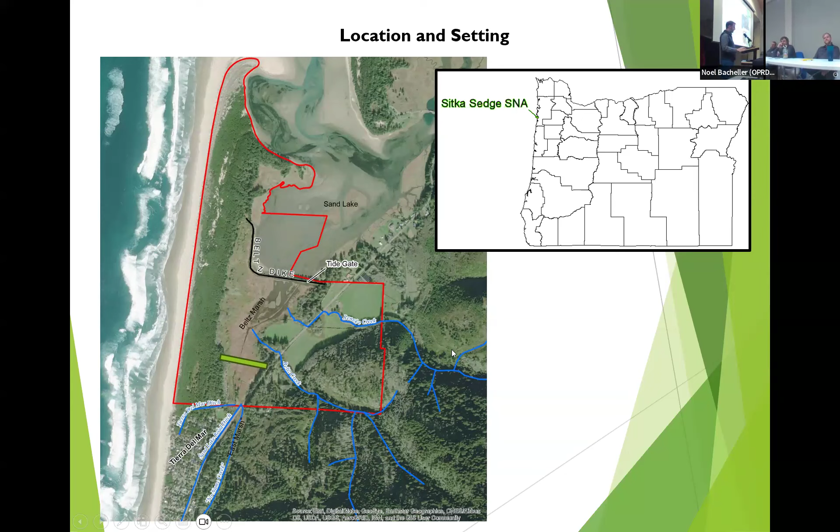The features that I was pointing out earlier to those that are here in the live audience is the size of this existing tide gate. This is about a 4x4 opening in the dike, and it's a concrete box culvert. The flap here used to have 4x12s on it. Those 4x12s are all gone now, so water rushes through unimpeded, and it blasts through this thing like a fire hose.

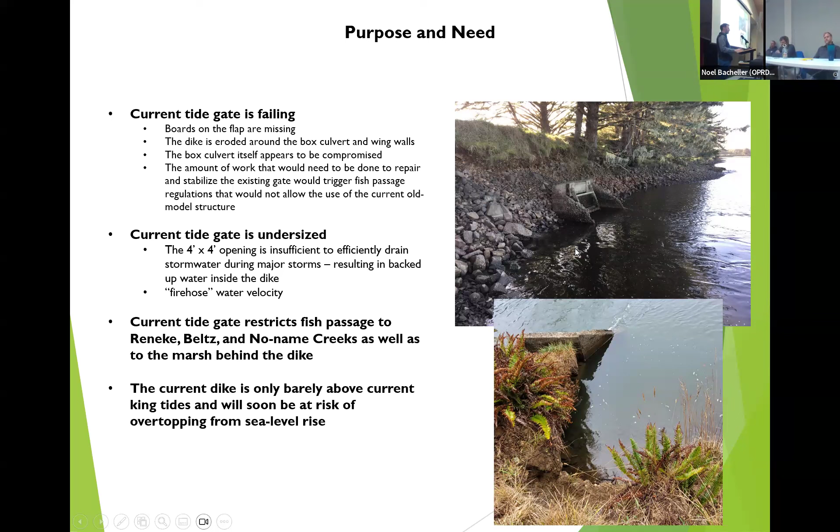This photo at the bottom is showing the amount of erosion that's happened inside of the dike as a result of the really high water velocity blasting through the tide gate. We get eddies here that eat away at the inside of the tide gate. This tide gate, I didn't mention this before, but this tide gate is not repairable legally because of modern fish passage laws. So it would have to be replaced with something bigger and better, like a muted tidal regulator or something else that meets modern fish passage requirements.

I went over this verbally. I think probably most people online heard me say most of this stuff already, so I'll skip past that one and that one. Pointing out these alternatives that we looked at before. This is the existing condition, do nothing, leave the tide gate exactly as it is. As a bookend reference condition, the other end of the spectrum is to breach the existing dike.

Then the more actively pursued options are muted tidal regulator. Shown here, this one has 2 doors, side hinged, that have a set closure setting, which can be chosen as part of the construction design. And then the setback dike here, shown in red, is the last option that was pursued, which would have a muted tidal regulator in it, but a much smaller one because it only has to pass the water from a couple of ditches and one creek.

This setback dike would be accompanied by a breach of some sort in the existing dike, maybe with a bridge over it, maybe with a boardwalk. That is yet to be determined.

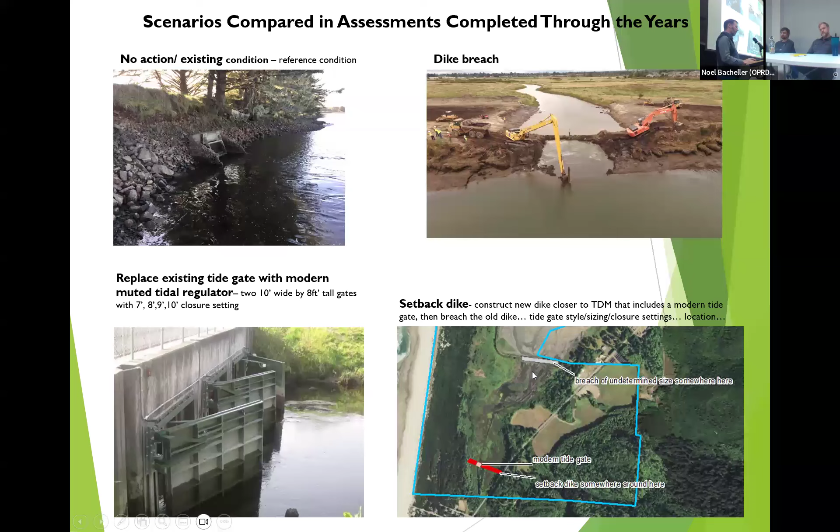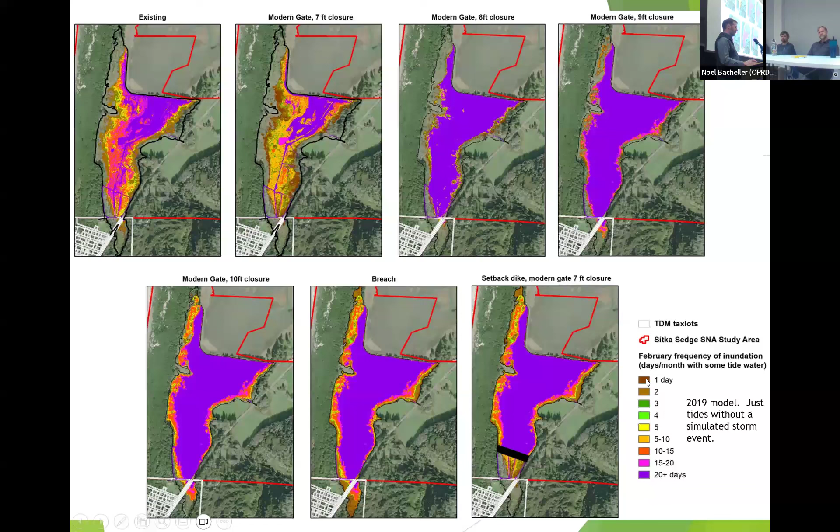Then this graphic I was explaining also as an example. There are many other graphics similar to this, but this one is showing the month of February and the number of days in the month of February that each spot on this map experienced tide water. The hotter the color, the more days, well, not the hotter the color. The purple color is the most days of water. The brown color is very few days, like 1 day of tide water being present at that spot on the map.

Then here's where we were with the video, and I'll start this back up again. The upper left is the existing condition up here. It's the existing dike and the broken tide gate that we already have. We have the modern tide gate with an 8-foot closure setting as the second frame. The third frame is the no dike situation. This could be seen as 1935 or before, or it could be a breach. This is just as if there were no dike at all. This is what you would see in terms of water. And then the setback dike is the frame furthest to the right.

The graph at the bottom shows the water surface elevation that is modeled or observed to occur in each of these locations. So in the case of the blue line, this is the water levels that were observed outside of the dike. These other lines are what would be expected under either the modern tide gate with an 8-foot closure setting in this orange color, the setback dike alternative in this sort of reddish color, and the existing condition in this greenish color. The blue color at the bottom here is rainfall. And this rainfall event that we're seeing here is a 50-year storm event, approximately.

And what we're seeing, both in this graph and up in the map above, is that under these circumstances of a large rainfall event, the water just doesn't go out for days. And this is because of the small carrying capacity of that undersized culvert through the dike. So days on end, water in, whereas the other potential alternatives all flush out that tide water every day, every tide cycle without much of an issue. There are minor differences in how quickly it goes out, as you'll see, as it runs through these scenarios.

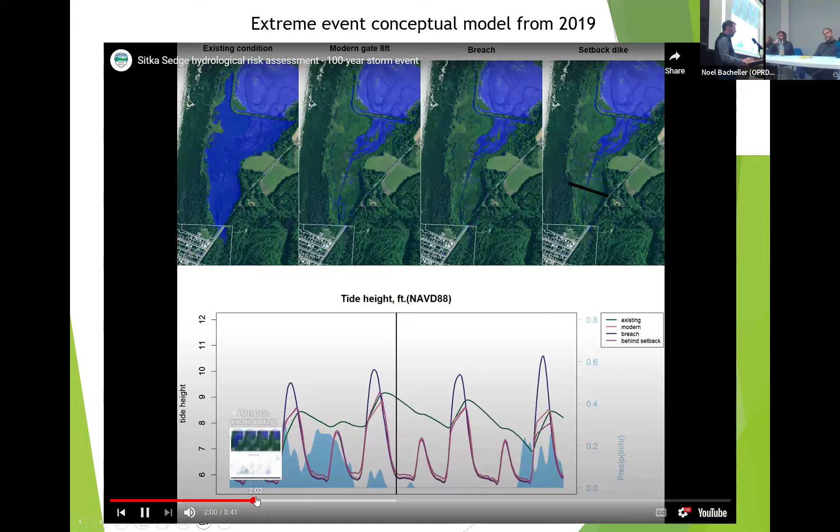And it's most obvious when we scooted ahead to a 100-year storm event, coupled with a 12.2 king tide, which is the highest ever observed tide that we know of in Sand Lake. So this blue here is like a ton of rain, right? And this 12.2 foot tide here is coming up on the screen. You'll see how far the water penetrates into the south as a result of that incoming tide. And see it passes way down into here. And you'll see it also passes way down into that terrain in the existing condition as well. Passes through somewhat also in the other alternatives, but as you'll see, they all respond a little bit differently.

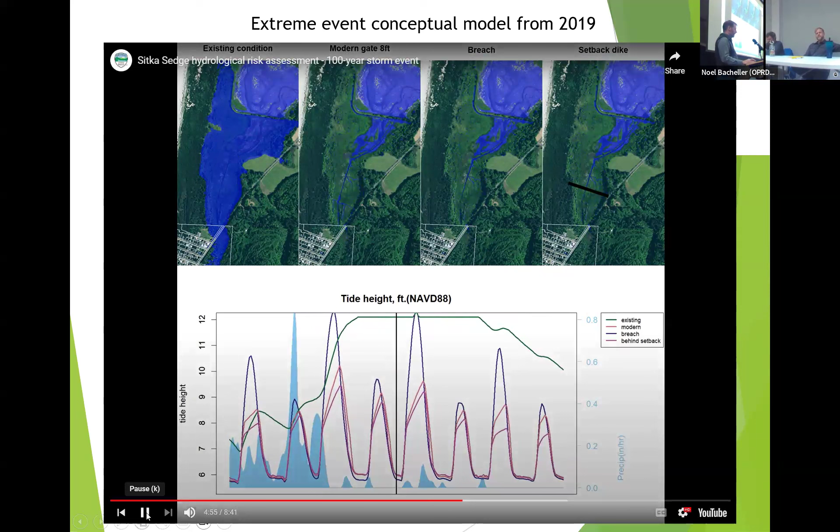The existing condition, however, stays in, as I said before, for days on end, and it is really the worst case scenario as far as surface water near Tierra del Mar goes. You'll note also that on an outgoing tide, the setback dike drains out a little bit faster than the modern tide gate through the existing dike. So that's the gist of that video. And this is available on our website, and it has been for quite some time.

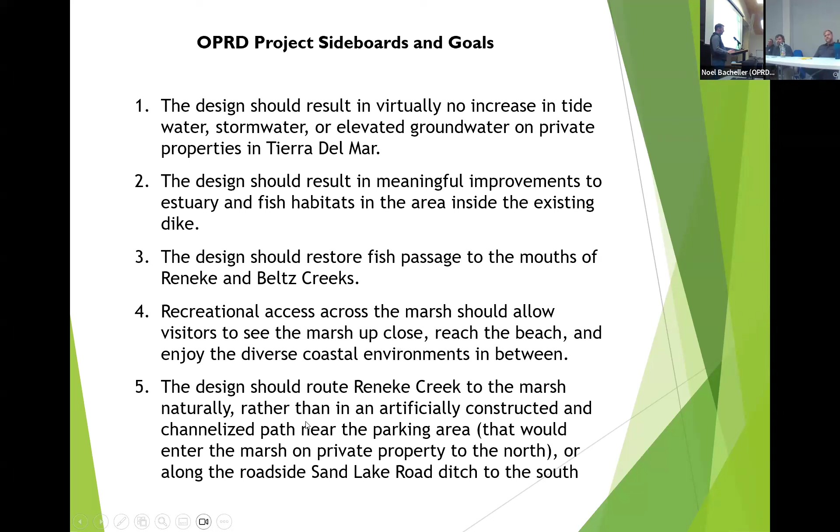I will move on to the next slide, which is Oregon Parks and Recreation Department's stated goals for this project. Number one is that the design should result in virtually no increase in tidewater, stormwater, or elevated groundwater on private properties in Tierra del Mar. Number two is the design should result in meaningful improvements to estuary and fish habitats in the area inside the existing dike. Number three, we should see some fish passage improvements to the mouth of Reneke and Beltz Creeks. Recreational access should continue, and the design should route Reneke Creek to the marsh naturally and not in a ditch.

So comparing the pros and cons of the various alternatives. This was all done in 2019. There was a public tech team process to go through all of these alternatives and hear testimony from a variety of standpoints. And these collected pros and cons get at the content of that 2019 process.

Modern tide gates in the existing dike is another alternative that has been assessed over the years. The pros of this are that it limits tides reaching private properties in Tierra del Mar. It lets stormwater out efficiently. It gives some fish passage, but the cons are the fish passage is not perfect. There would still be a relatively small opening in the dike with excessive velocities during certain stages, which would cause potentially erosion, scour, changes in the way that sediment accumulates in the mouth of the dike. It's better, but it's not as good as the setback dike in terms of overall package.

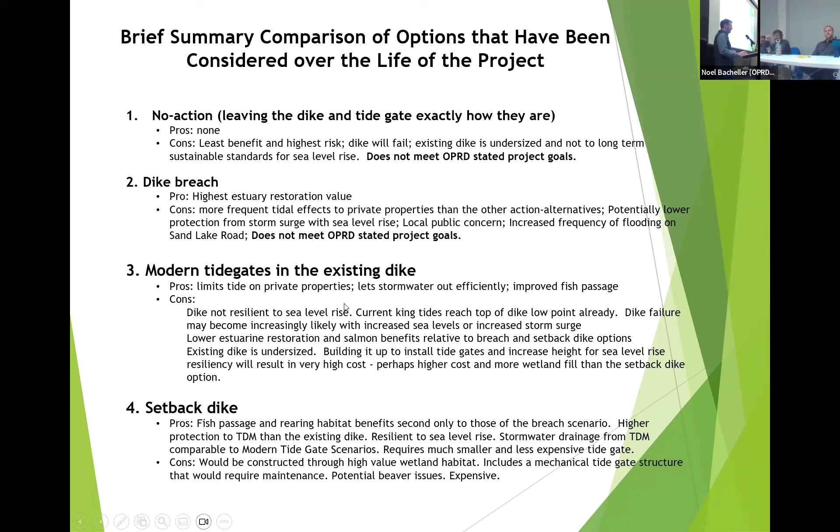And in 2020, Oregon Parks and Recreation Department leadership, after presenting the options to the Tillamook County Commission and to the Oregon Parks and Recreation Commission, and after the series of four tech team meetings in this building in 2019, OPRD leadership chose the new setback dike as the alternative to pursue. And in 2020, issued a fact sheet about that decision, which is still on our website to this day. And in the summer of 2020, while we were looking into pursuing grants, OPRD received a letter of support from the Tierra del Mar Community Association.

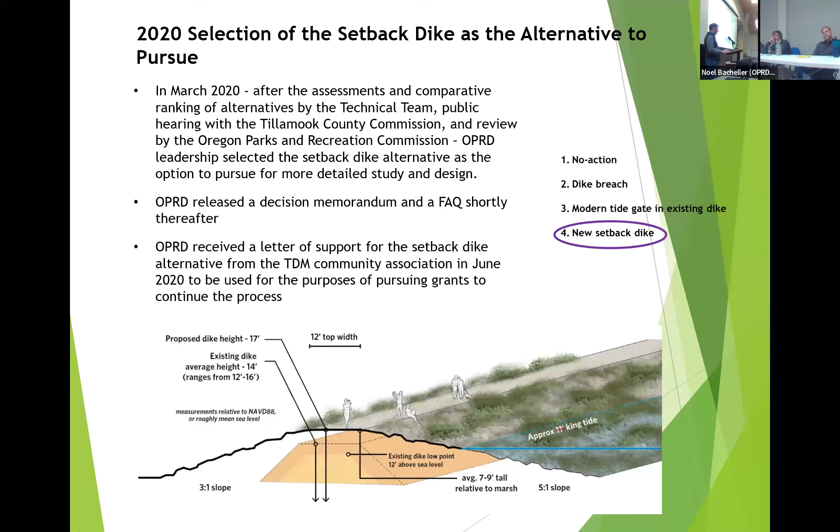Then 2020, right? That was COVID year. Everything got kind of derailed. OPRD staff no longer had capacity to really pursue this. And fortunately, Tillamook Estuaries Partnership was there with the expertise and the grant giving ability to step in and be a great partner in helping to continue to move this forward. And so in 2020, Tillamook Estuaries Partnership really took the reins on finding money, finding a contractor, and moving design forward. And that has moved us up to our current status of 30% design.

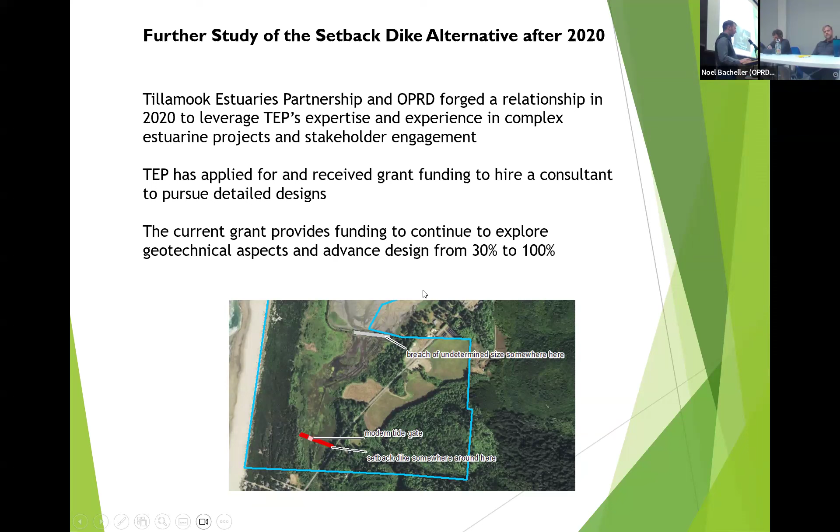This process that was undertaken by Tillamook Estuaries Partnership in coordination with Oregon Parks and Recreation Department involved hiring Environmental Science Associates, and you'll hear from Hunter White on a lot of this work coming up as the next presentation, but it involved trying to figure out exactly where a setback dike would need to be. And this is kind of experimental. You have to try different places, model them, and see how they turn out. So there was a little bit of moving it around and finding the sweet spot for where a setback dike would be.

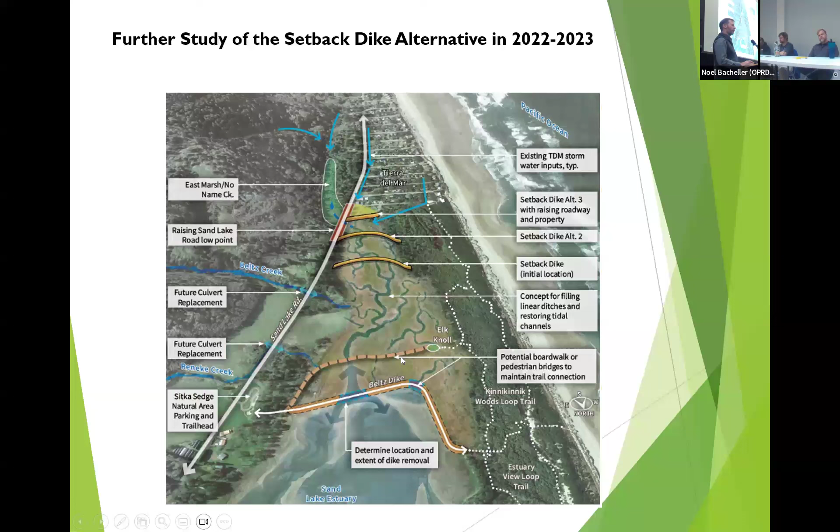We also had to investigate what exactly would happen to Beltz Dike itself. Would it be a single breach, or would it be multiple breaches? Would there be bridges? Would there be boardwalks? These are all the kinds of things that were assessed in the first 30% of design.

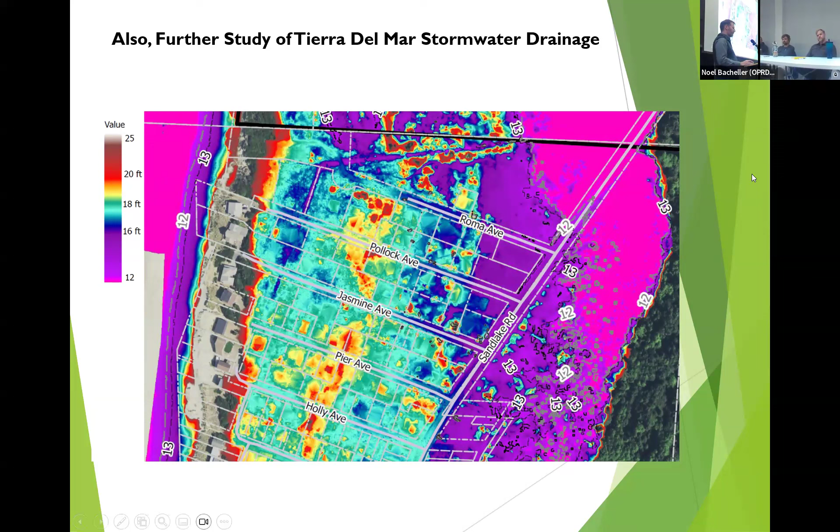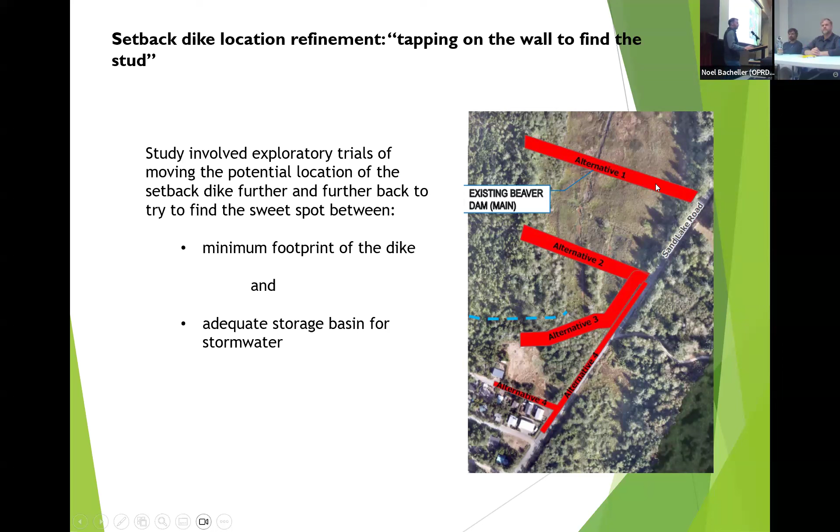We found that using the criterion of needing enough storage basin for the stormwater coming down from No Name Creek, Tierra Del Mar, Sand Lake Road Ditch, and Tierra Del Mar Ditch, the storage basin capacity was such that the setback dike had to be pretty far north to handle all that water. At the same time, we're looking to minimize the potential size of the setback dike because this is a lot of nice marsh area that would be impacted by placing the structure here. In the end, alternative one was the only alternative that met all of the goals and criteria for this project. It was the furthest north.

It had adequate capacity to store stormwater flowing downhill into the marsh. The setback dike has a tide gate in it, and when the tide comes in, that tide gate will be closed. While that tide gate is closed, there has to be enough space behind the setback dike to store all the stormwater without raising the water into Tierra Del Mar. So the further north you move it, the better able it is to store that stormwater without backing up. Alternative one was that spot.

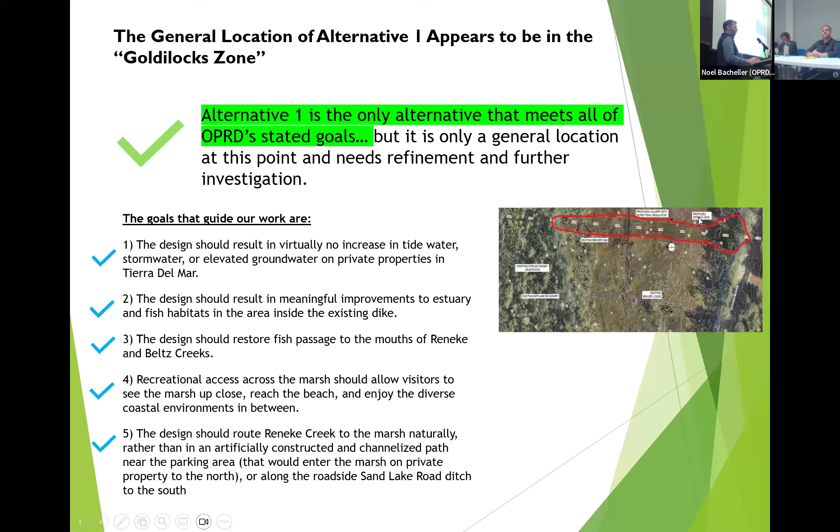So the setback dike has effects on habitat. As I said before, there's 1.5 acres of wetland habitat that would be covered by a new setback dike. But on the other hand, the project, by allowing unfettered estuarine tidal function to occur, would restore about 70 acres of natural estuary that's been closed off from the estuary and marine influence for many years. The natural tide cycle would be restored in about 78% of the land within the range of the tides behind the tide gate, and 85% of the marsh within the park.

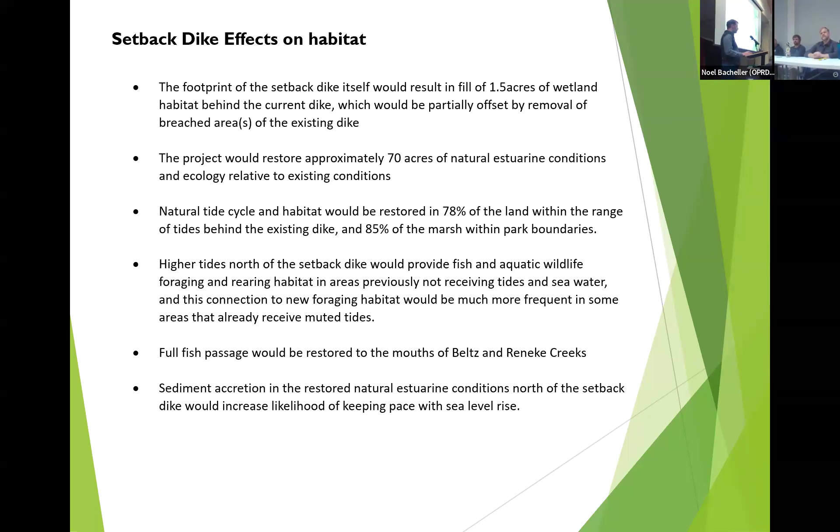The higher tides north of the setback dike would be a great benefit for fish and wildlife foraging in that area associated with estuarine habitat. There would be full fish passage restored to the mouths of Reneke and Beltz Creeks, and the sediment accretion rate gives us a better chance, better odds of being able to keep up with sea level rise.

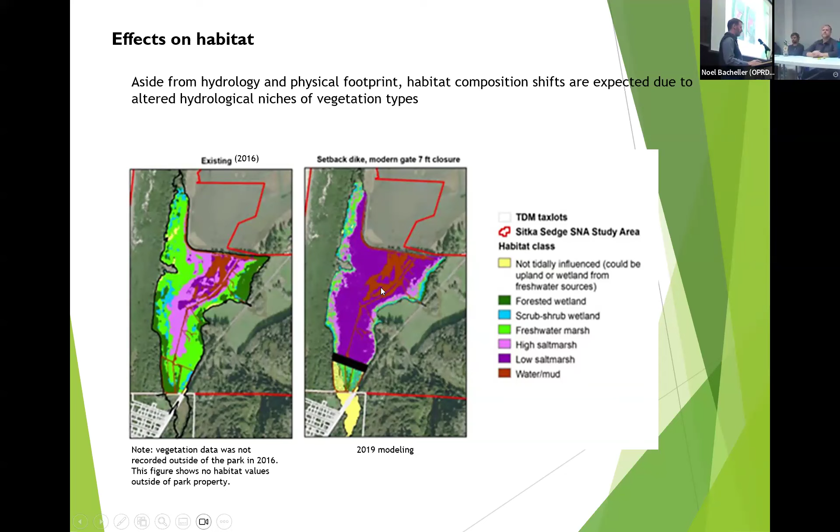In this situation on the right, the setback dike with a modern type 7-foot closure, what we're seeing is that the habitat shifts towards low salt marsh and pushes the other habitats towards the edges of the marsh, as more water is allowed to flow in its natural form in the estuary with the setback dike.

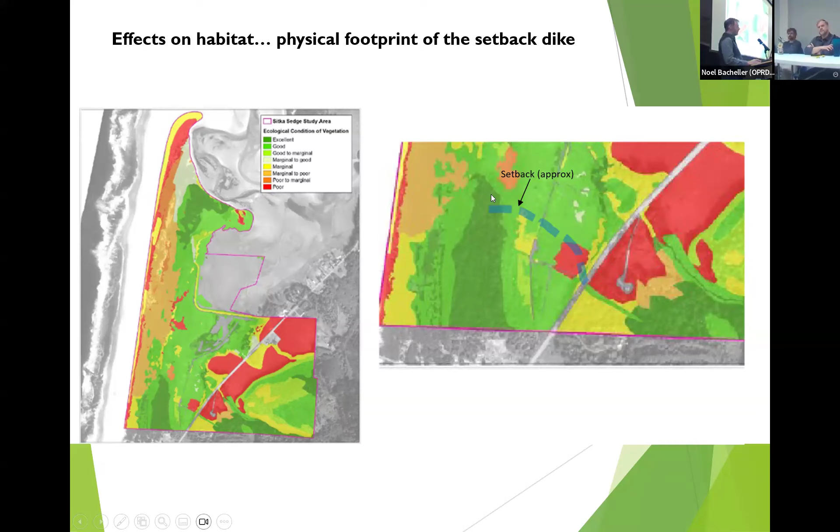In terms of the condition of the habitat that is potentially impacted by the setback dike, this map ranges from greens to reds, greens being habitat in excellent condition, lighter green being good condition, yellow being marginal, red being poor. These conditions are largely based on the vegetation that's there, whether it's weeds or good stuff. Red is mostly weeds, dark green is almost entirely good stuff.

The effects on private property are a huge consideration here, and the setback dike would block the tides from the high tide gate closure settings from intruding into private property. Since it would allow water to flush out more efficiently, it would dramatically lower the amount of water backup during big storm events. Sand Lake Road would no longer be overtopped by periodic flooding that currently results from water backing up in the existing condition.

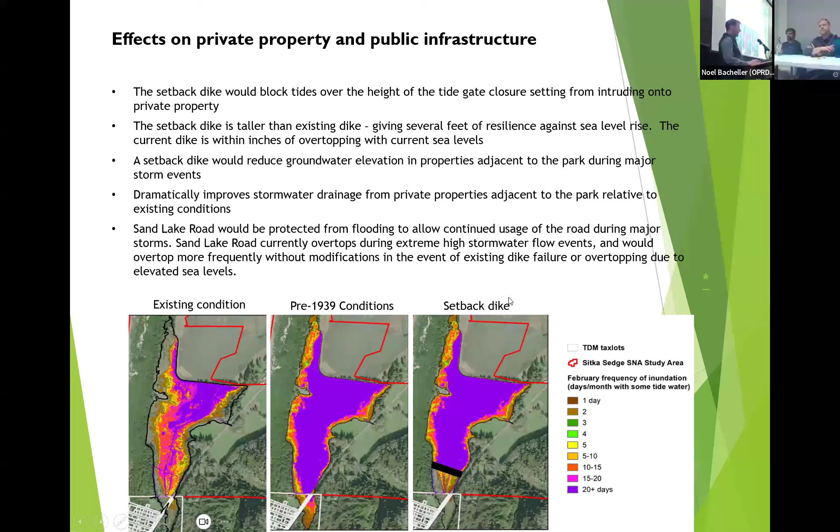The question mark is whether much of this green is already wetland or not, and we don't know that yet.

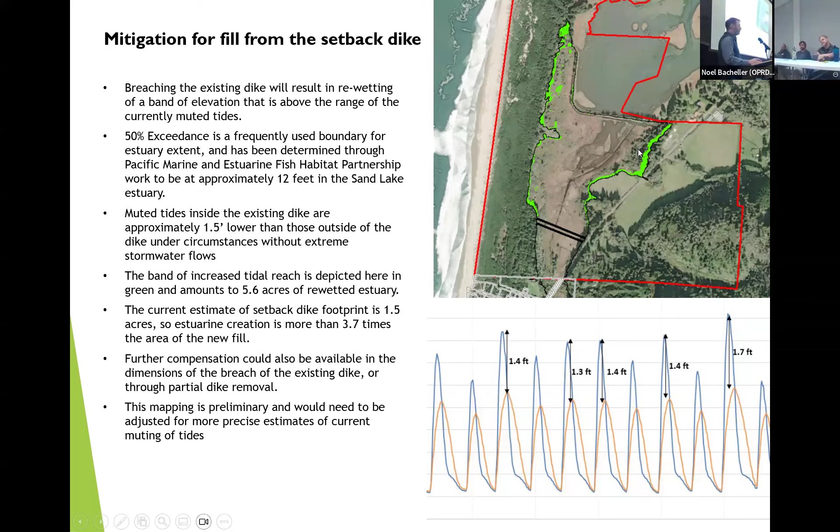My last slide here is next steps. The big next step we've been waiting to do for quite a while, that will really inform the next stages of design, is geotechnical assessment of constructability and cost, etc. We need to move design forward from its current 30% phase to 100% phase. We need to investigate permitting, exactly what that looks like in terms of mitigation, county permits, FEMA permits, etc. There's a lot of moving parts there. And grant funding is huge. Right now, Tillamook Estuaries Partnership has received a new grant that has allowed us to restart this process with funding sufficient to bring us to 100% design, but there's no money yet for implementation or construction. So that's the huge piece that's hanging out there for later.

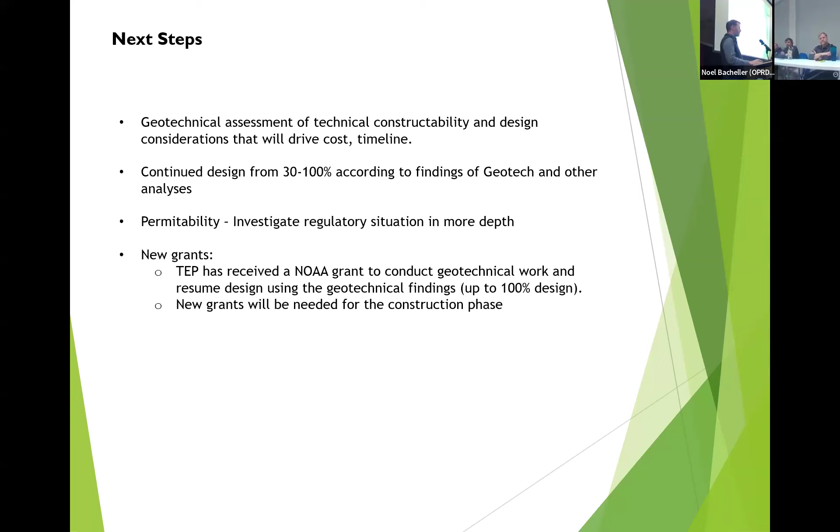And with that, I've concluded my section and will hand it over to Hunter.

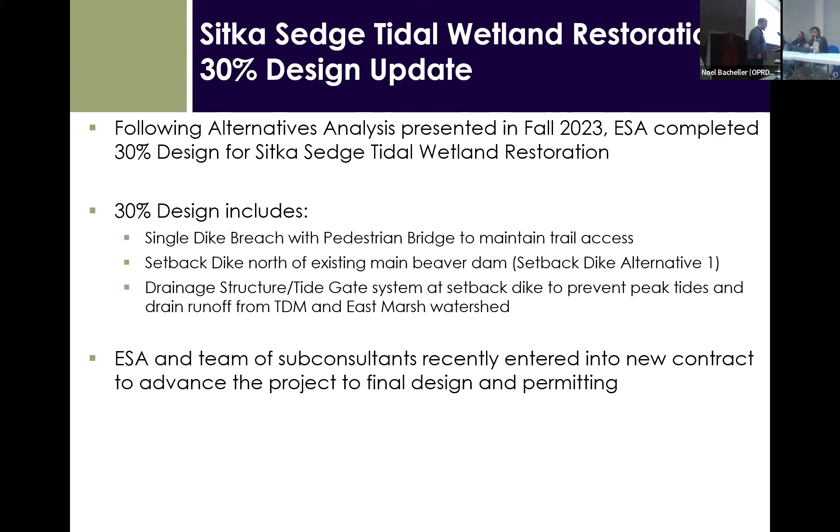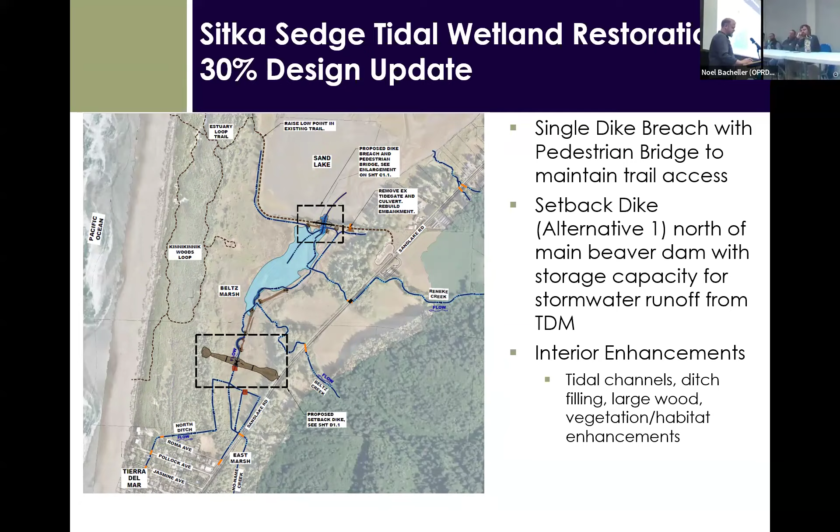So I'll start zooming in on each one of these elements and talk a little bit more about each one. Here we're zoomed in on the proposed dike breach. We're showing our grading plan for opening up the dike here. You can see in cross section down below how we maintain trail access, recreational access to the larger trail network within Sitka Sedge State Natural Area.

The plans currently show a 200-foot span pedestrian bridge over this breach, and this is a detail that we'll be refining as we move forward through additional hydraulic analysis, looking at how sediment will move through that breach, the tendency for that to scour, erode, or fill in with sediment. So we'll be doing a lot more work to determine how big and how deep to make this.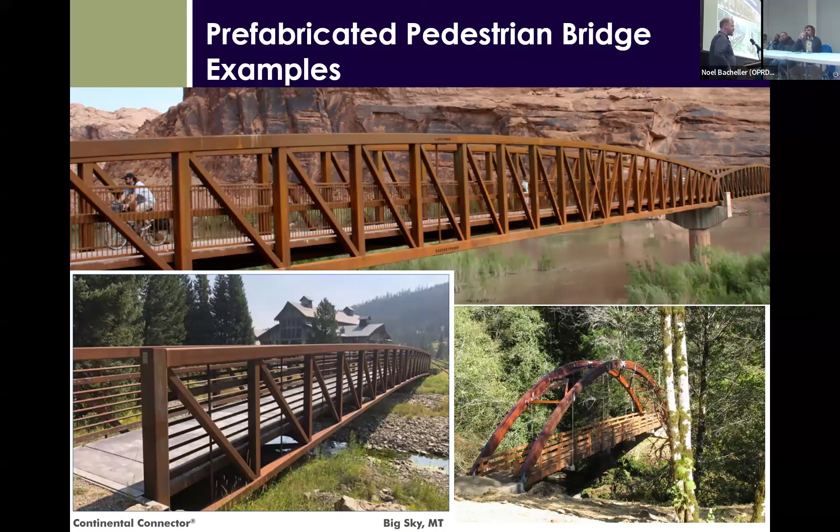Part of that, as Noel mentioned, was to make sure that we had enough storage capacity behind the setback dike to contain all of the stormwater runoff from Tierra del Mar while not increasing water levels—but in fact lowering water levels beyond what currently occurs today.

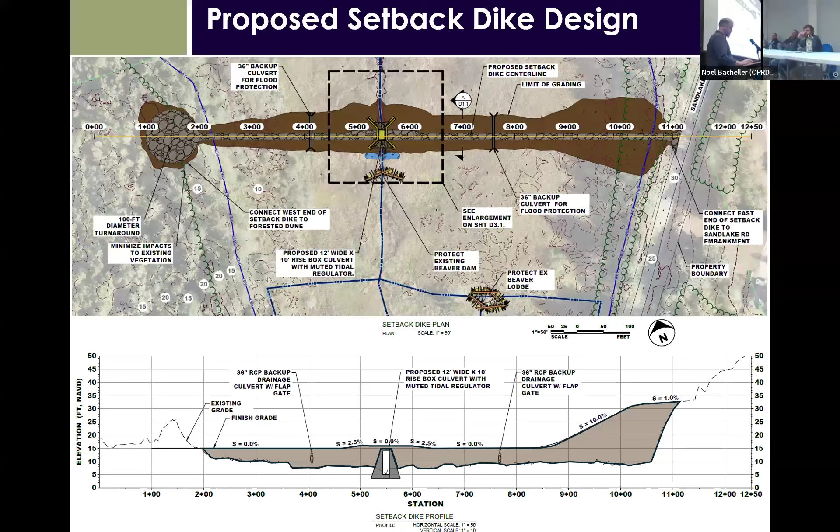So looking at the setback dike in cross section, showing the height of the setback dike. On the bottom here, we're showing the existing ground surface of the marsh, with about 10 feet of fill here. The multiple lines you see are really showing that we will need to overbuild this dike even higher than we want it to end up, because when you place all of this fill on soft marsh soils, we will experience settlement of the ground beneath.

So we'll likely need to build this dike over at least a 2-year period, doing an initial build height, letting that material settle, coming back in, building it up, topping it off to where we want, and overbuilding it extra tall, so that in 50 years from now, with continued settlement that will occur, the dike will still be tall enough as we look out many decades into the future.

I am showing the 12-foot water level here in this blue line, just to show that the proposed height of the new dike is a lot taller than even the peak water levels that we see today, both to have extra room, extra freeboard factor of safety built in to handle those high water levels, as well as to be prepared in the future for sea level rise.

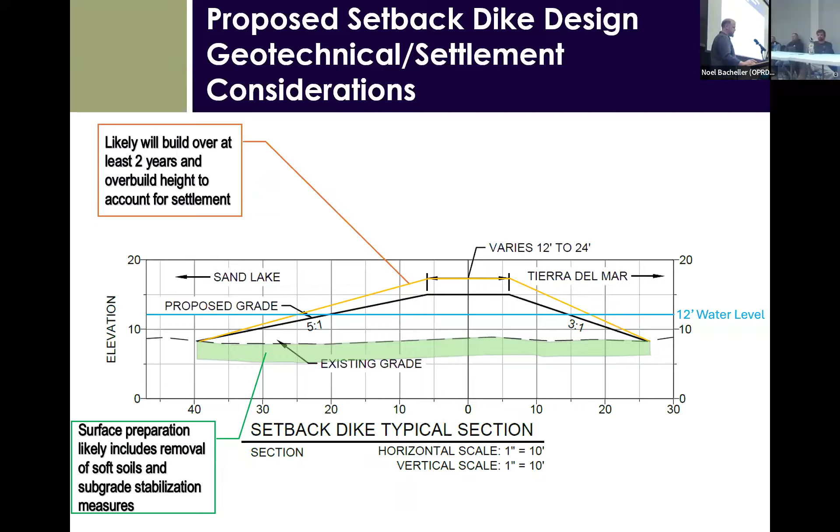We have some geotechnical investigation and engineering work ahead of us to inform what we need to do to the ground before we build this dike. This likely includes removing some of the soft soils, doing other subgrade stabilization measures to create a solid foundation to build the dike.

You see, because this is in an area of existing heavy beaver activity, we will need to make sure that beavers aren't going to be able to get in and block this structure. So we are working with ODFW as well as beaver specialists about how to make sure that we do keep beavers away from blocking the structure.

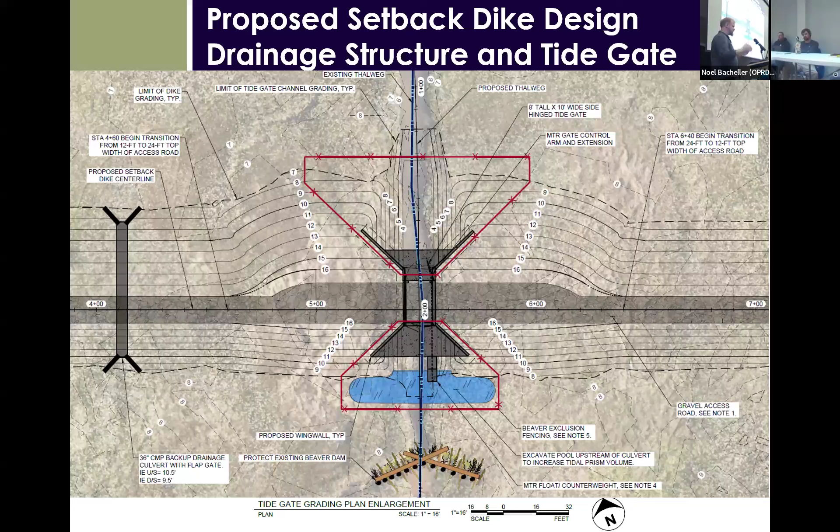You see here one of these extra redundant bypass culverts that we're proposing. They wouldn't be flowing all the time, but they would be perched up higher, so not attractive for beavers to plug in the first place, but in the event that something were to happen and the structure were blocked in some way, we would still have extra drainage capacity to drain off that high water. These will be fitted with tide gates, most likely just traditional flap gates, not intended for fish passage in any way, but to keep water from coming in while allowing that water to drain out.

Again, we're getting into some of our engineering drawings. This is a cross section of the setback dike at the proposed structure. This would have a concrete floor to it, essentially a large concrete box culvert with the tide gate system associated with it.

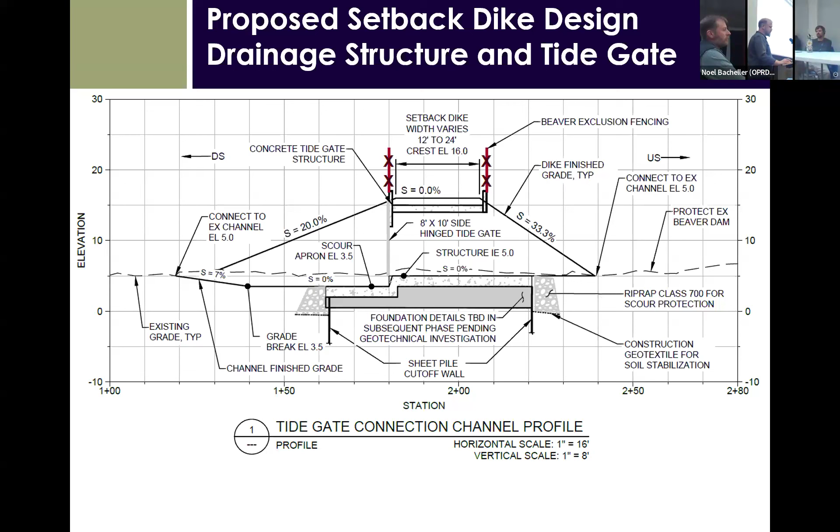So this is the level of design detail we're at right now. My team, as well as the structural and geotechnical engineers we're working with, have developed a number of these designs in similar settings, so some of the details here are consistent with other systems that we've built.

As we mentioned, because we're in an area that already has beaver dams, beavers will likely remain at Sitka Sedge after the reconnection occurs. So we need to think through and be prepared for how beavers may behave around the new infrastructure. Beavers are known to plug culverts when it's beneficial for their habitat, creating ponded areas for them. Blockage of infrastructure, like the culvert at Sand Lake Road and the East Marsh Crossing, now has a cage around it to prevent some of that blockage. These blockages have drainage and flooding implications, as well as maintenance implications that will have to be considered moving forward.

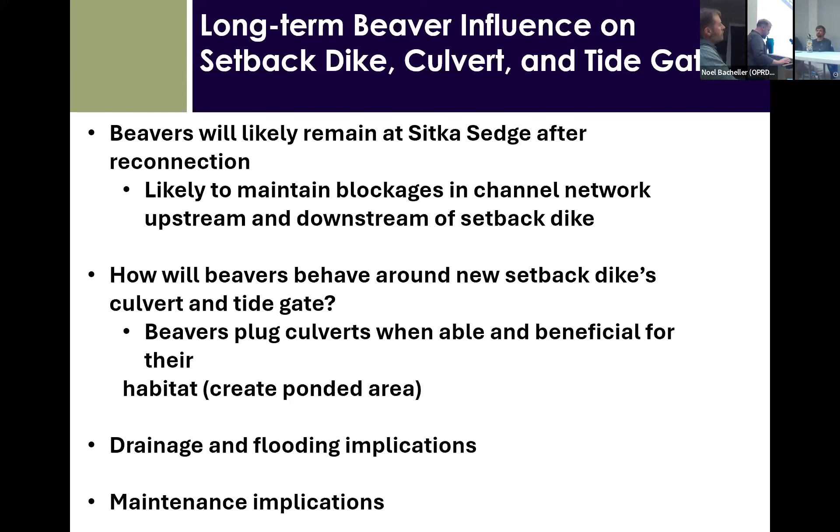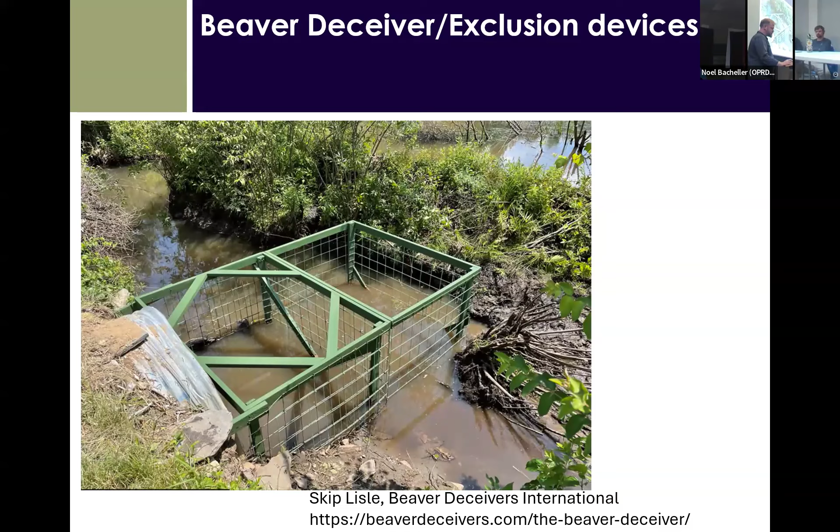But at this site, because as Noel mentioned, the vegetation and the wetland is high quality, there will be trade-offs to getting heavy equipment out into the marsh to do these sorts of interior enhancements. So as we look ahead, not only to fill ditches and dig new channels, but also install large wood structures that we often include for fish habitat, we'll be considering those trade-offs. Is it worth it to get out into the marsh to make these improvements versus the impact that work would cause?

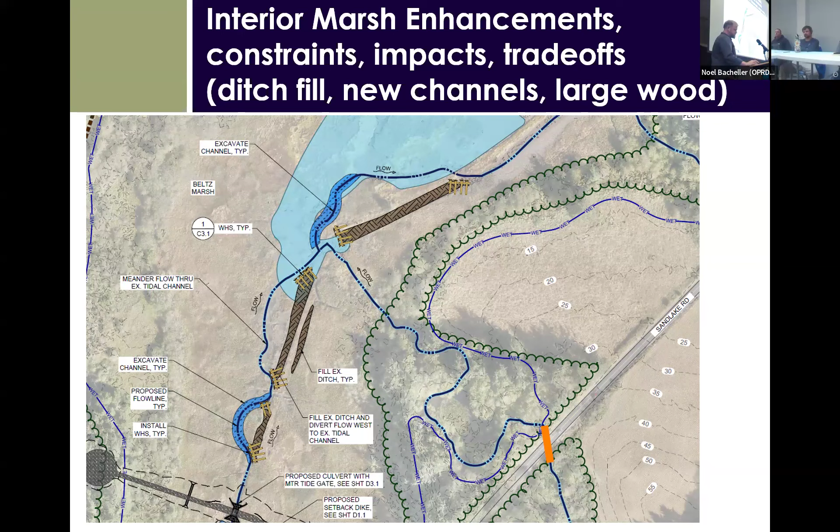You can see at essentially the same moment, there's water backed up in the ditch upstream of this culvert, while the downstream end is free flowing. It's not backwatered by tides at this moment. So this is really just a demonstration of the capacity of this culvert to drain water off of Tierra Del Mar. We are proposing to upsize this culvert as part of the project to improve the efficiency and drainage capacity of the Sand Lake Road ditch, which in turn should help improve the drainage of the rest of that ditch system.

As Noel mentioned, in the previous phase we did a much more extensive evaluation of Tierra Del Mar's drainage system and identified a number of potential improvements, deficiencies, and tough areas that really have poor drainage to get water away. Those could be addressed in a future project, but this is the one culvert that is directly within that range of potential tidal influence, so we are proposing to include that as part of the Sitka Sedge project.

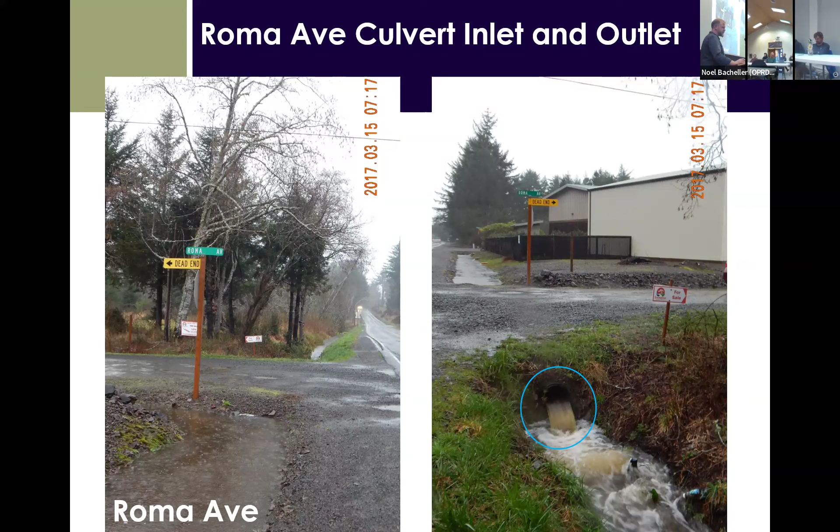Under the existing conditions, we do see 12-foot water levels at Sand Lake Road at this low point. Again, the setback dike will improve these water levels, but again, showing the 12 and 13 foot as just a reference point for the fact that this Roma Ave culvert is currently within that potential tidal range.

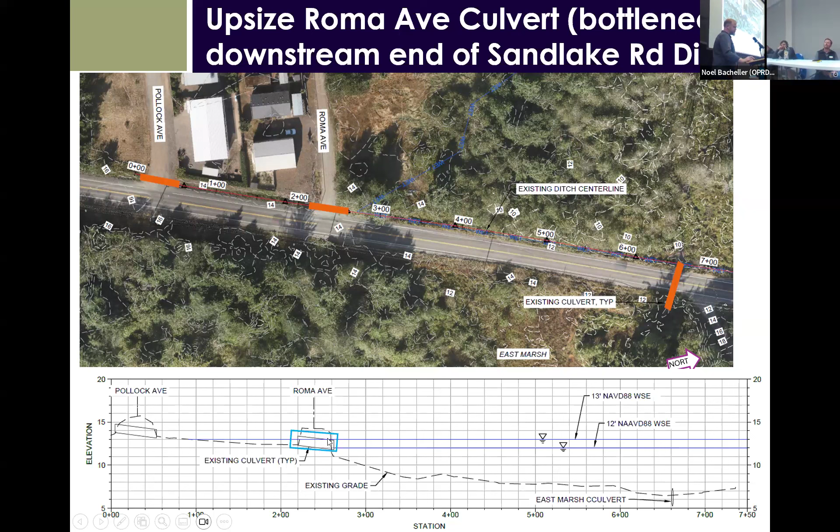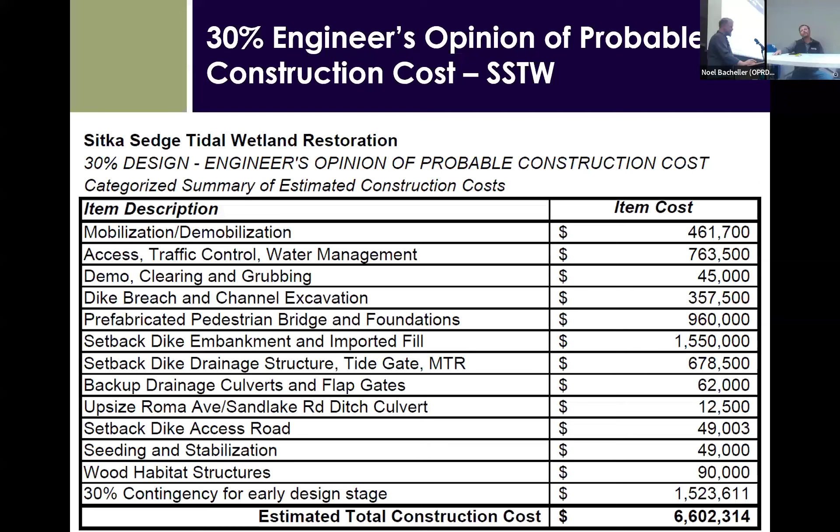And so at this point, we've just discussed all of the features associated with the Sitka Sedge tidal wetland restoration project itself. And now Chris and I are going to tell you a bit more about the Sand Lake Road crossings and work that we've been doing in parallel. Thank you. So I'm Chris Laity. I'm the Public Works Director and County Engineer. I wear a variety of hats with this. The nice thing about this larger project is the design team with OPRD, TEP, and others have decided to take a larger look at this, which includes Reneke, Beltz, and No Name. So not just Sand Lake itself, but also the roadway network. And I think that speaks a lot to the relationships that we have.

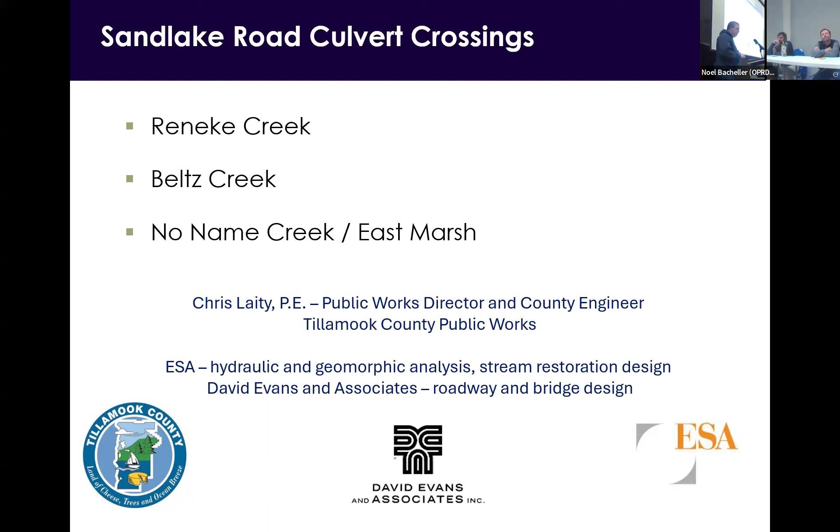So those are the three crossings that we looked at. In particular, we've got the Sitka Sedge, where you park and go out there. You've got Reneke Creek, the next one closest to Pacific City. If you look out there, it actually flows in the ditch line and then crosses the road. So for everybody that travels that, this is the location where you end up going through high water. If you notice recently, the water will go over the top of the road and it'll try to undermine the asphalt. A couple of weeks ago, we put some concrete on the downstream side, a concrete bridge beam. So if you're driving by there, you'll see something there that's intended to help protect.

Further to the south. So in this particular case, let me back up. 30% was funded to come up with the design for Reneke, Sand Lake, and the Reneke Creek. So concurrent to that work, because they're doing all the hydraulic analysis for this project, we wanted to understand the location of that dike and the impact of that dike. You're going to remove it, you're going to put a tide gate, you're going to set it back. How does that impact Reneke Creek? What kind of impact to the estuary?

So we contracted and completed a type, size, location study. Type, what size should that be, and what's the location? All that was really part of the hydraulic analysis associated with the dike. So ESA has completed that work, and through TEP we were able to identify additional funds to get that up to 100%. Beltz and the No Name culvert have made it to 30% design and have funding up to 30%. They are waiting for additional design money for that.

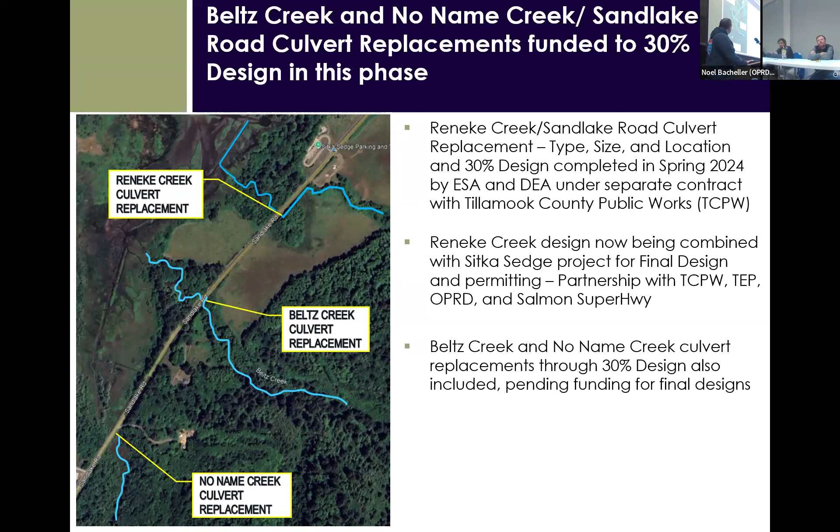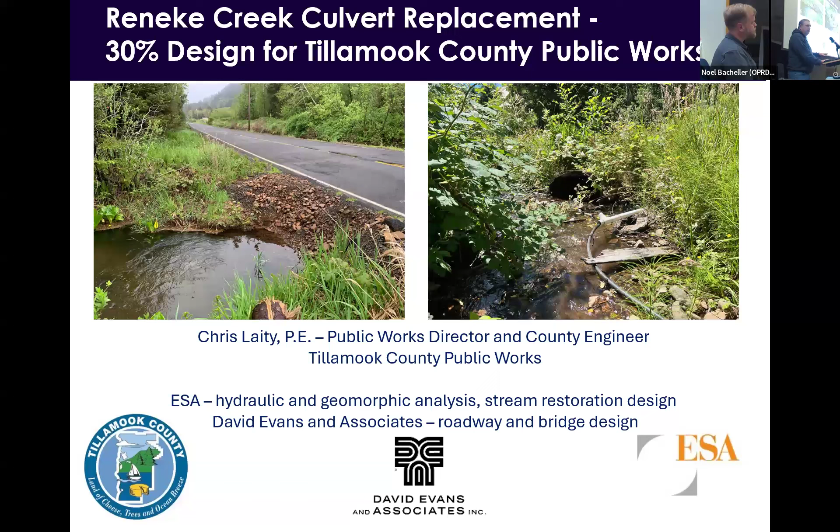Reneke Creek, a little bit more focused on Reneke Creek. The image on the left shows the outfall. That's the location where we ended up putting additional concrete that you'll see out there today. So existing conditions, Reneke Creek, as it flows from the coastal range towards there, you can see the original pattern. There used to be a 14-foot bridge out there once upon a time. Nobody can tell me exactly where it is, although I do have a great photo of that bridge. The creek was modified to accommodate a situation when the culvert was undersized, and it was carrying a lot of debris coming off the range there. Not so much coastal range, but the group of mountains that separate the 101 from here.

So all that debris would come down and it would plug the culvert. And then county crews would go out there and they'd unplug the culvert, and the estuary would come in and silt it back up. The county would then open it back up. The next winter, it'd plug up multiple times a year.

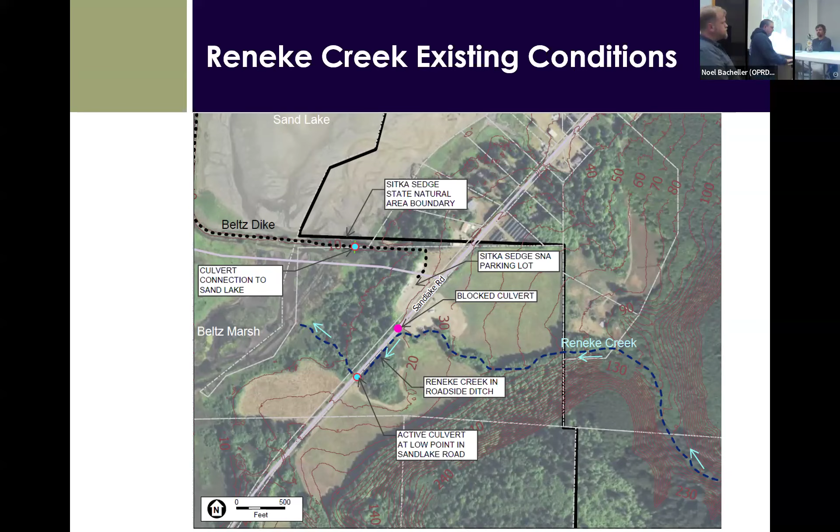So when you look at this in particular, the 1939 to 1953 to 1977, that really started to inform the discussion of what do we need to do today. So with this, I'll hand it back to Hunter.

Thanks, Chris. So as Chris said, in parallel with the Sitka Sedge project, we started working on Reneke Creek under a separate contract with the county. We wanted to look as far back as we could at what condition for Reneke Creek should we recreate here. And going back to the 1939 oldest aerial we could find, you'll notice a few things here. Really, this entire area was forested.

Reneke Creek itself, if you look more towards 1977, it's closer to what it looks like today, where Reneke Creek is really just in this narrow band of creek and alder trees, a very narrow riparian area that Reneke Creek has been constrained to. And also just to point out in 1977, as still exists today, there's this little triangular patch of forested wetland that still remains.

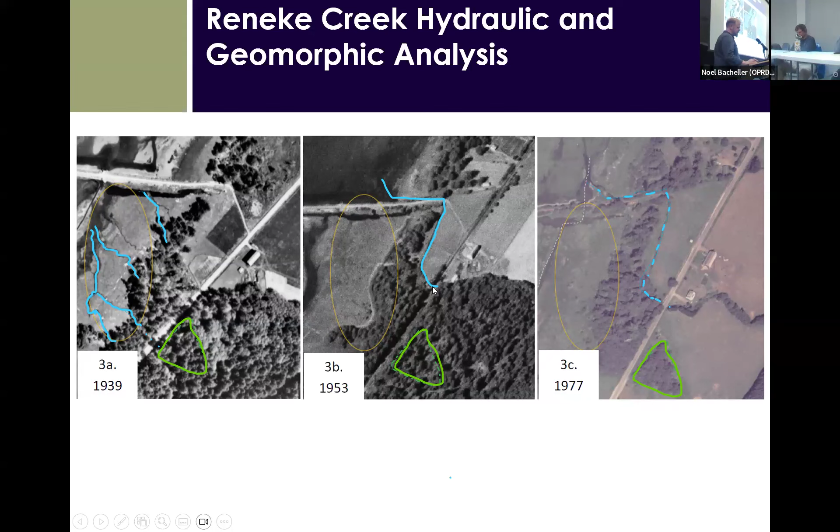There's been a lot of thought about should we be restoring Reneke Creek into this channel that some folks remember as the historical alignment of Reneke Creek. But our research is really showing that that channel was created and showed up just before 1953.

And so, in addition to this historical air photo analysis, we did an analysis of the geomorphology of the system, of really how does the basin behave? How does it move sediment? And what we found through analysis of LiDAR elevation data, as well as on the ground observation, is that Reneke Creek, when it comes out of the steep hillside, it's a very steep channel. It has the capacity to move a lot of gravel, but then once it hits the flat floodplain, it loses energy and it drops these gravels.

And so as that happens over thousands of years, the gravel deposit fills in Reneke Creek's channel. When that channel fills in, it kind of moves itself over, creates a new channel, another big gravel deposit. That channel fills in and it moves over again.

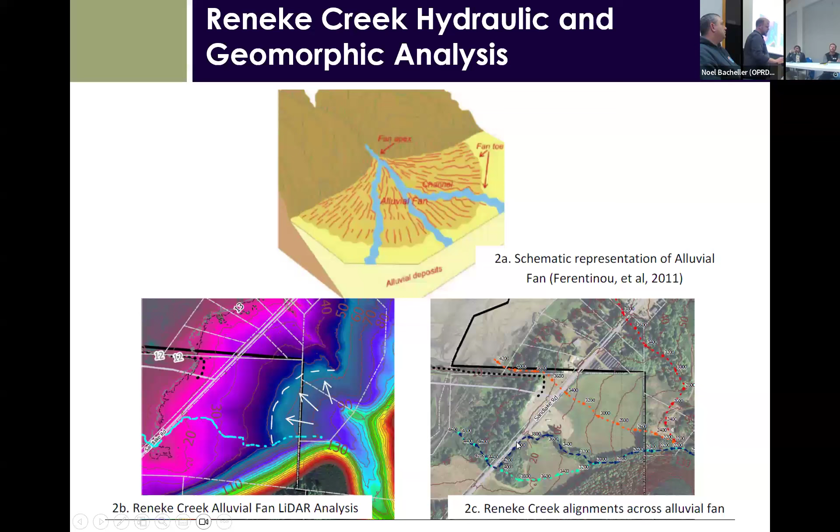So you can kind of imagine this as, through those modifications that I just showed you, Reneke Creek has essentially been pushed over to the left side of this alluvial fan and really boxed into its current position. We looked at a number of different alignments that we could restore for Reneke Creek.

And so the county has this low point that overtops. They need a replacement. They need to put in a new bridge and raise the road up in this area. And so it really makes sense to make this the primary crossing point for Reneke Creek to get across Sand Lake Road.

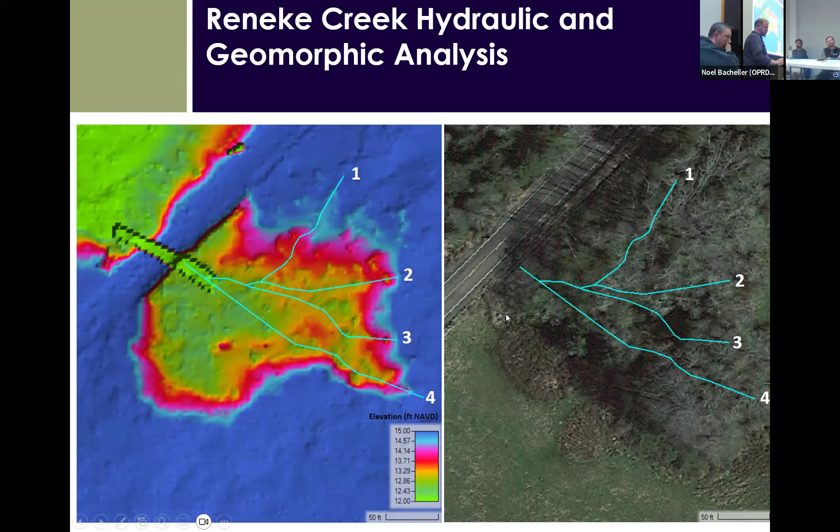Another cool thing that we discovered out there is within this triangular patch of forested wetland, there are several channel flow paths that still exist today that were likely part of that natural multi-threaded channel that Reneke once had. It's a little bit hard to see, but this is just to show that in that triangular forested patch, there are creek channel forms that carry water, not only flood water, but even during the summer, you can see groundwater moving through this area to the low point in Sand Lake Road.

So with that, we've developed this conceptual design. We really want to get Reneke Creek out of that roadside drainage ditch, abandoning that culvert that has been filled in numerous times in the past, and provide not only a primary flow path for Reneke Creek to reach this low point, but also try to restore that natural forested floodplain and alluvial fan form that once existed here.

We're conditioned to think of creeks as single threaded channels. And in most conditions, especially in settings like this, more typical is for these channels to actually be multi-threaded, to activate at higher flows. And even as recent as last winter, we saw another big gravel deposit in Reneke Creek, right around this area. And we are already seeing Reneke trying to jump out in roughly the same location.

So that's a lot of the rationale and thinking, really the background for why we're proposing the design that we are today, which is to construct a new bridge at the low point, 49-foot span, 2-lane bridge, and raise up about 800 feet of Sand Lake Road to get that roadway up above future tide levels, as well as to make sure that we have enough freeboard beneath for wood. And then while we're at it, to restore the forested floodplain that once existed prior to the 1950s.

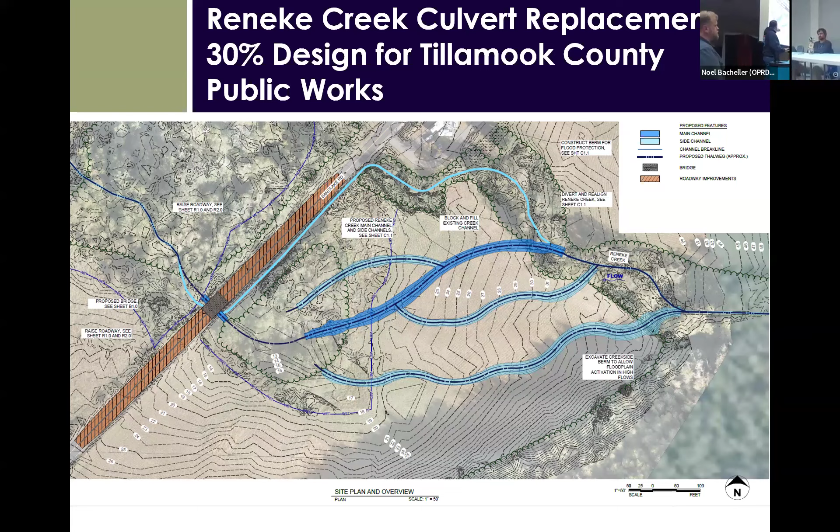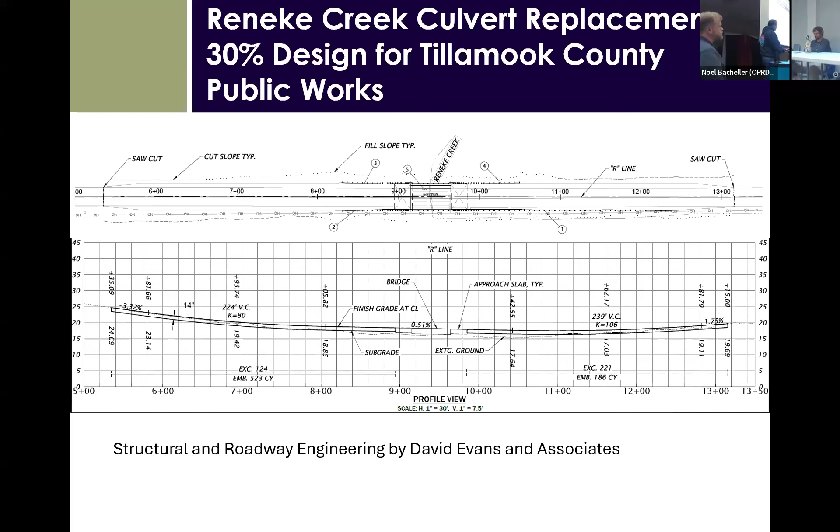The addition to this is the stream work. Engineering is put together by ESA and their sub-consultant, David Evans and Associates. In particular, you're looking at a 2-lane bridge a little over 55 feet in total length. You've got two 11-foot lanes and almost 5-foot shoulders.

We also get a fair amount of bikers on the road. So we tend to make some of these bridges wider than normal, because you can build one lane to carry all the traffic, then build the other lane to carry all the traffic. This minimizes the cost of having to do detour structures.

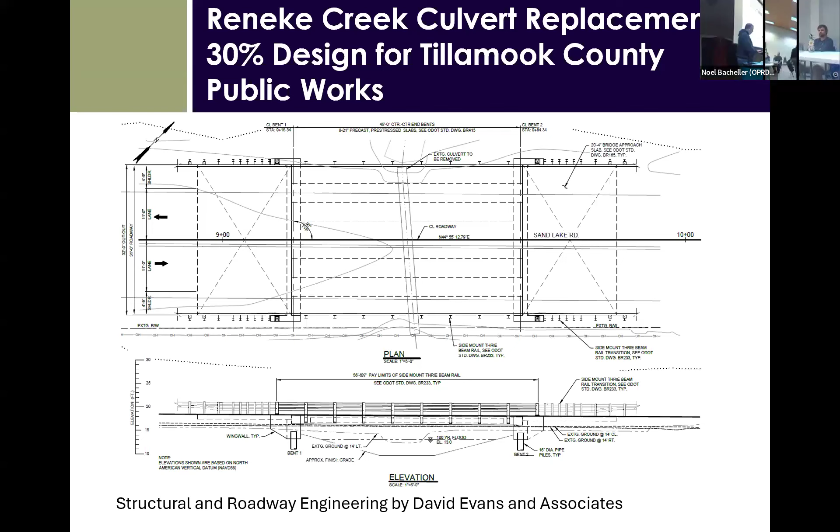In the middle, you can see the thin line that goes through there. That's the existing culvert, a diagonal that runs up and down on the page.

So we are currently through TEP. We are currently funded to go to 100% design and permitting, and that's being taken care of under a TEP contract with ESA. The county has applied for federal highway grant funding for $3 million to construct in partnership with Salmon Superhighway.

When you look at the Reneke Creek project, specific to Reneke Creek, we're going down two separate paths, because I didn't want to wait for the permitting and all the complexity that's going to arise with the Sand Lake work. So we're pushing this forward with separate funding tracks, and we applied for federal highway funding.

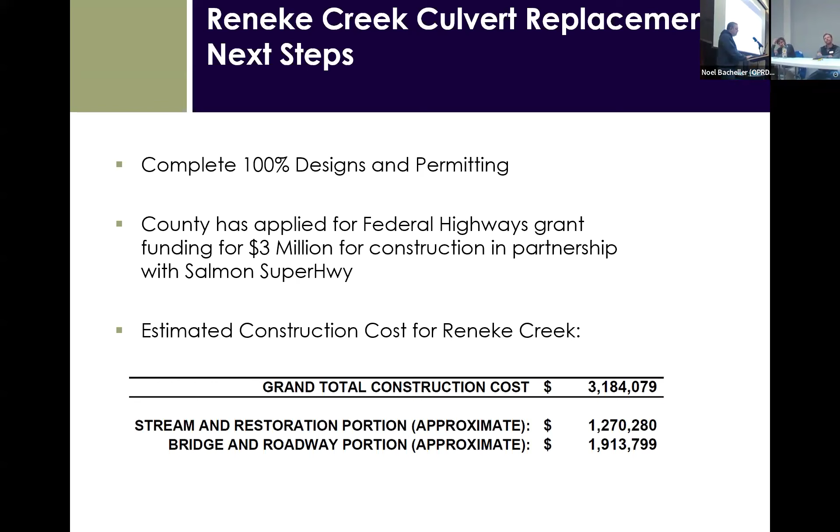To do the stream work, that's about $1.2 million. The bridge and roadway portion is about $1.9 million. So when you think of the grand total scheme, the $6.6 million including the Sitka sedge component, bridges are almost half of that expense. It does take a partnership that's really important for us to continue on.

So we're trying to push forward on getting that bridge established as soon as we can. It will take a while, it won't happen overnight, we do need to get grant funding for that. At that point, that's kind of the overview of Reneke Creek, and we'll kick it back over for Q&A.

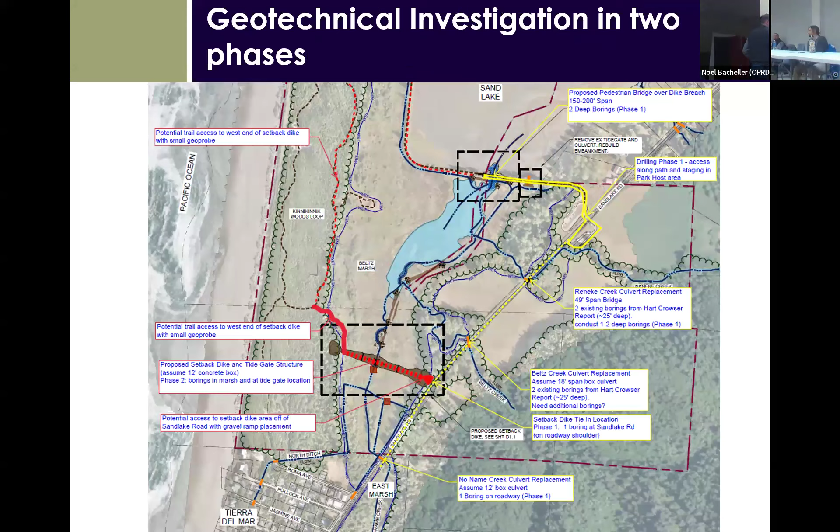My question was regarding the size of the breach, because every time we have a meeting, it gets bigger, wider. We started with 80 feet, 100 feet, 150 feet, now we're talking 200 feet, and that's the most expensive out of what we've discussed so far. In the last meeting we had some dollar amounts, and the 250 feet was the most expensive. So I just wondered what the benefits are, given the cost. Is it all for fish passage? How does that tie into the restoration project and setback dike? Given that this is primarily a fish passage restoration project, setback dike project, could you explain? Even in the TP executive summary for the grant funding, it mentions 100 feet, 150 feet, so I'm not sure we're starting another 50 feet wider, and what those impacts are and how that decision is being made, and the associated costs.

Apologize, I'm flipping through slides. We've got a bunch of extra slides here in case questions like this come up. And so you're right, you're noticing an increase in the size of the breach as we move forward.

The initial size of the breach we were considering was really: what's the minimum size that would be needed to fully allow the water level in Sand Lake to propagate into the marsh? How big of an opening do you need for that full tidal connection to occur? When we looked at that in 2019, we had an 80-foot wide breach, and you're seeing some difference in numbers too, because it's narrower at the bottom, about 30 feet wide at the bottom and about 80 feet wide once you reach the top. So that was about the minimum size needed to fully connect tidal hydrology into the marsh.

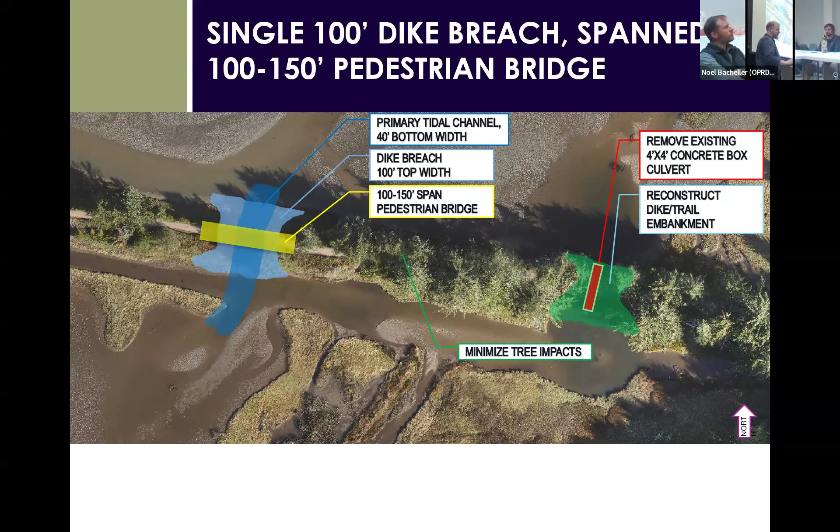During the last phase of work, we looked at different sizes of that breach, and with the different sizes, how do we maintain that trail access? One example: as we're talking now about opening up this breach and putting a bridge over it, we need to think about not only how does the water get in and out, but when it is moving in and out, is it going to erode those banks? Is that going to be a stable opening?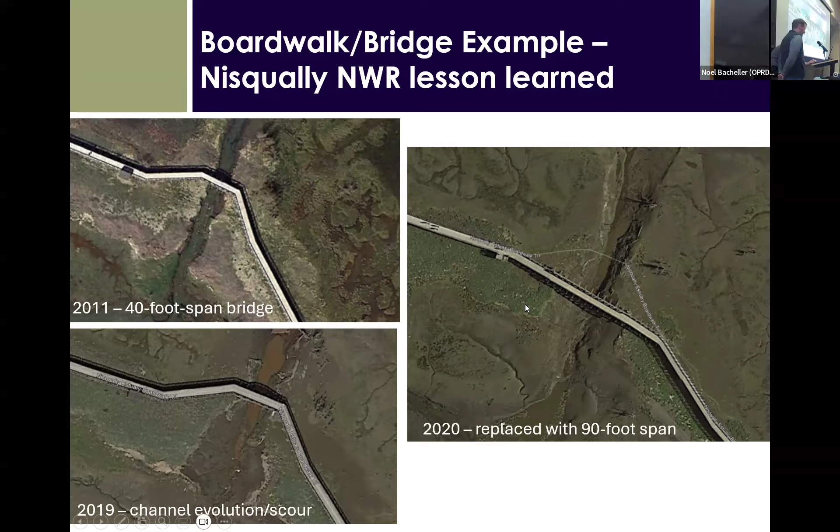I know that when we first did the discovery of this area, there were a lot of native plants found that they were not aware grew here, which is amazing. So just like the establishment of those plants and propagation, I'm curious if with the new ecosystems potentially being developed because of this plan, along the west side showing different levels of strata, the different layers, if potentially the public could get more knowledge through signage and seeing these plants and understanding how these systems work. So just having this trail network come further south on that west side, potentially accessing that.

So the question is, with the vegetation diversity and interesting plants occurring out in the marsh now, and with the changes we're envisioning for the marsh, will there be an opportunity to facilitate their persistence, and also interpret those areas, providing access to those special plant communities and species? Absolutely, the vegetation niches for these plants are like bathtub rings. All of these plants occur at very specific elevations relative to sea level, so it's easy to predict where they'll want to be. We can plant them in exactly the right spot once we know what the hydrology will be, and then plan recreational access and interpretive access around them.